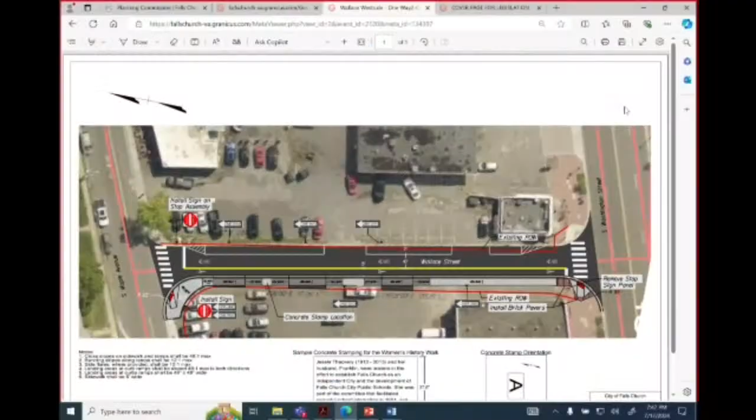One of the bigger issues or comments we had from last time was that the width of the street was about 15 feet wide, and seeing if there was a way to reduce it. So one of the things we tried to do is include a bike lane, and by shifting some of the curb lines, we were able to include a contraflow bike lane to maintain two directions of travel, as Paul said, with the northbound side being a shared lane. So we were able to get that width down.

I think that also resolved another comment about the speed hump and how necessary it was. By reducing the width, we were also able to omit the speed hump from the design from last time.

I think there was another comment about the curb ramps, seeing if we could make those more parallel with the crossings, and we were able to accommodate that as well.

There were a couple other comments we thought over but did not include in this iteration. One was trying to reduce the amount of driveways—there are 3 driveways we're maintaining on Wallace Street. In talking this over with Zach, it seemed there wasn't a precedent to remove or reduce driveways if we weren't already changing the lane use there. Since it was going to remain parking, and the property owners weren't interested in including the sidewalk project on their property at all, we decided not to go that route and just maintain the 3 driveways we had.

Thank you for responding to the comments. I really appreciate the way you walked through those. I do wish the speed bump was in there—we talked about that last time. I also wish trees were in there, but I'm glad to see the contraflow bike lane. I think it's generally improved, and I understand the narrow street is going to be a traffic calming measure too. So I appreciate that, but appreciate the way you responded to the commission's comments.

Let me open it up to other commissioners for any other comments, questions, or concerns. Ms. Freelander.

I was a little disappointed that all the discussion for adding trees and a streetscape that actually meets the streetscape standards—since we're trying to make this more pedestrian street by narrowing the width—I was a little bit disappointed that was sacrificed for a bike lane in the opposite direction.

When I'm looking at the bike plan, the master plan bike plan update, this area does not have a connection on South Washington at this location identified as a priority route. So I'm wondering why we are adding to and diluting the master plan for the bike where we want to be directing bike traffic. We're already going to be narrowing the street, making it one way. I'm in agreement with making it one way to slow traffic down and narrowing it, but I don't want to sacrifice having a pedestrian-friendly streetscape when it's literally a barren wasteland over there right now, as a pedestrian.

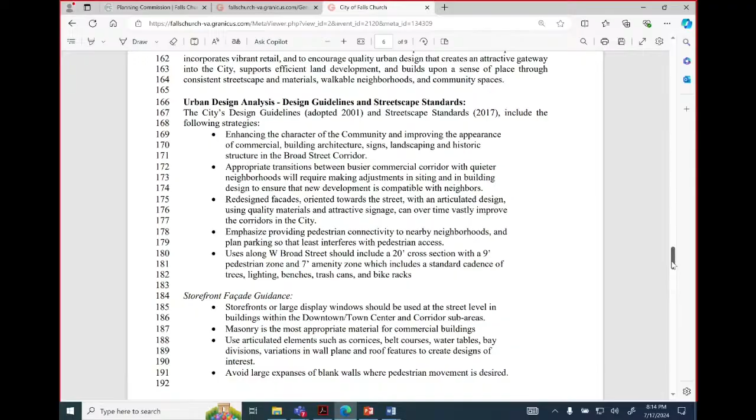To date, staff has reviewed three submissions of the site plan for compliance with city codes, policies, and regulations. As you may remember from the previous work session, the first review of the application materials identified several instances of missing necessary information or proposed site features that would require waivers of site plan requirements in order to be recommended for approval. The applicant's second and third submissions reduced the number of these missing items but did not address several others. Staff also identified some inconsistencies between the engineering and architectural plan sets. With this third submission, staff has been able to review the requested waivers and their justification.

Most notably, the requested parking waiver is not necessary, given that there is a surplus of proposed parking. This may also mean that some or all of the required 5% parking lot interior landscaping or landscaping buffer may then be provided as opposed to waived.

Staff comments on the third submission of the materials were transmitted to the applicant on July 3rd, 2024, upon completion of our review. One other procedural note: tonight the Yassini Jewelers site plan is under review next door by the Urban Forestry Commission, and a recommendation from them will be made available before any public hearing on this application. However, while site plans are typically also reviewed by the Architectural Advisory Board, the AAB was not able to reach quorum for their July 10th, 2024 meeting in which the project was scheduled to be presented, and the AAB recesses in August.

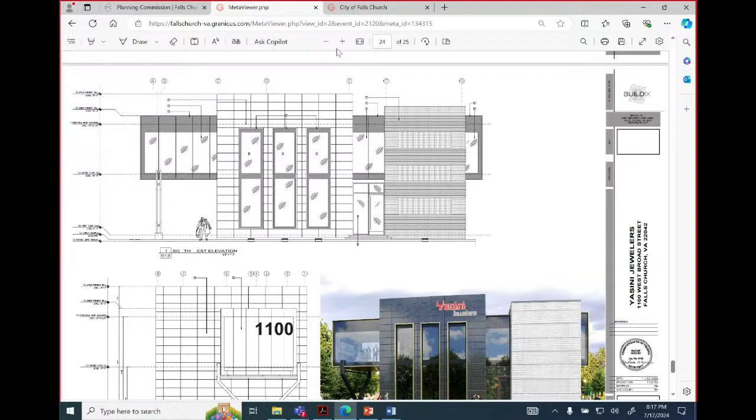So as recommended, we added 3 windows in front of the building. You can see on the 3D renderings. And we removed that driveway, the drive-through that was there. So those are the only architectural recommendations that you had during your last session. And I'm here to answer any questions about the proposed new

revised elevation of the building. Anything else from staff, or? No, that concludes our staff presentation. Thank you. Okay. Any comments from commissioners? This is a reminder, just a work session item, so.

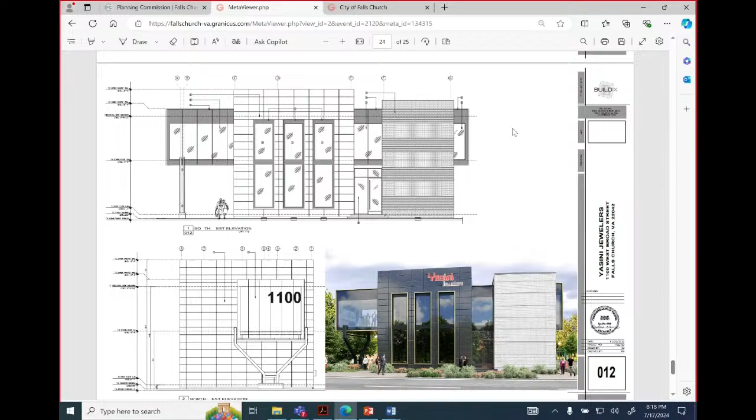I guess one thing I should comment, I know it came up earlier about what happened to all the city arborist comments. Charles Prince, the city's arborist, is out of the office on medical leave. And so we do have a second certified arborist on city staff. Eli Swadner is also a certified arborist. He's actually the head of our tree crew. And so while Charles is out, Eli's going to be reviewing, of course, all the development applications. He's actually sitting in with Urban Forestry tonight on the other side of that wall. So we will be getting those reviews. It's just taking us a little bit of time to catch up with where we are in the timeline.

Thank you. Small correction there, Paul. Charles did review the latest submission, and he actually indicated that he had no comments on the submission. So our interim arborist will get any future submission and will be part of the review. So it's no comments from the arborist at this time? At this time. The expectation that... Yes. Yes. Thank you. Okay.

Comments from commissioners? Let's see, Mr. Krasner and Ms. Freeland. Yeah, I just had a procedural question. Just the issue of the architectural board, is there a mandate for them to review it? Or is that an advisory thing? Where does that live in? I know we have statutory authority to approve site plans. We did have to look into this. Where does that live in the city code, or where is it? Or is it just advisory? Yeah, we did look into this, and it does say that the Architectural Advisory Board does have to review site plans, but it also does indicate, along with, I think it's the Historical Board, does also have a certain period of time in which they must be given the opportunity to review it.

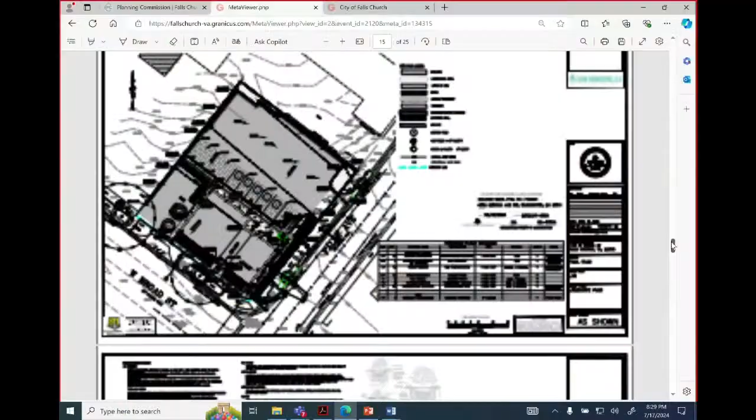It looks like there's a lot of signage, which is great, but you passed the landscape plans. For the signage, have we received a signage package? I'm sorry, I thought you were responding, there must be a lag on the line. Were you going to respond to the landscaping question?

The only thing about the landscaping - you said the older one seemed more current. I was confused by that statement, because the one shown on the screen right now states it's sheet L01. The cantilevered portion of the building is not shown, and it appears to be over a tree.

We had a previous session like this back in February, and during that meeting we were asked to remove the curb cut on West Broad because we already have one on Falls Ave, and within that we moved the cantilever because it was for a drive-through for the bank.

It's in the rendering, though. So I agree with removing the curb cut on West Broad to achieve more landscaping, but the building rendering indicates a cantilevered portion on the second floor that extends over the pedestrian walkway to the west of those buildings - the shaded building here - that is not shown on this plan. So the cantilever that lives above those trees is not shown, and those trees appear to be 20 to 35 foot tall trees. If you look up the tree type, it's Carpinus caroliniana.

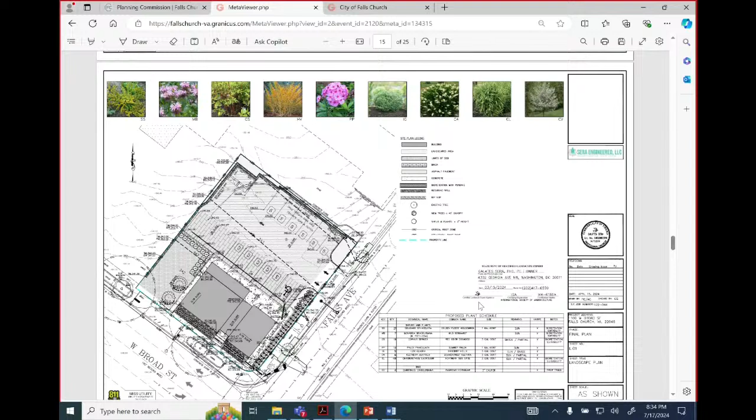So I'm looking forward to it actually coming to fruition, and to get there, we've got to work with the city to figure out how to get them what they need in terms of the trash truck, and making that a safe turning radius in and out, making it look realistic, because I was a little concerned that the approach isn't realistic.

I agreed with a lot of the DPW's comments on that. There's also a couple of other comments on one of the civil sheets that still refer to DC standards. So we've got to make sure you pick up not only the Maryland standards and change those to Virginia standards, but also the DC standards being referenced as well.

But I'm really looking forward to seeing this further developed after you've worked with the city, maybe with another couple meetings with them to get through all the comments.

Thank you. I don't know who asked us to, but we were going through the comments, and one of them was about the trash truck coming in and out—can we reverse in, or do we have to come in front end and leave front end? I know there were probably some conflicting comments that cropped up on that issue.

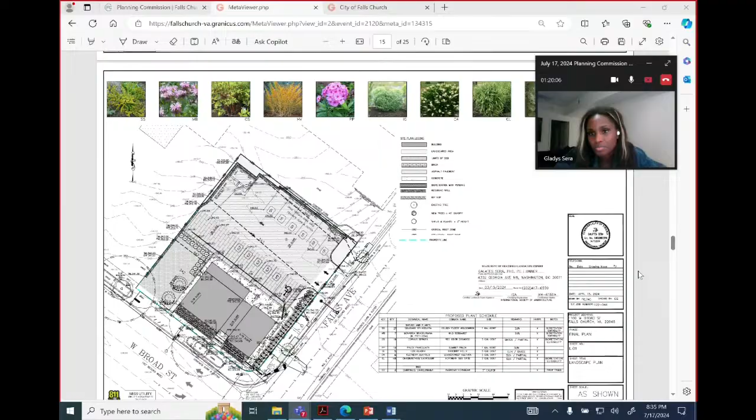There is a stipulation in the city code that car parking cannot back out onto the public right of way, but as the planning and zoning staff have looked at that, we're of the opinion that same restriction doesn't hold for trash and loading. The principle behind that is trash and loading is a fairly uncommon thing—it's not happening as a matter of routine throughout the day.

Larger trucks have backup alarms, they have professionally trained drivers. So I think the planning and zoning staff is of the opinion that, especially with smaller lots like this one, allowing the trash and loading to back actually does a lot for you in terms of urban design and walkability, because it allows you to get to a greener, more landscaped site. Otherwise it took heroics to show the turning movements in the parking lot, and as a result almost 30-40% of the hard surface was just for that three-point turn.

So I think it's acceptable to have the trash and loading back, either back into the site or back out onto the public way. That's a common condition even in our special exception projects—for example, the Lincoln at Tinner Hill has trash and loading backing out onto Maple Avenue.

Because it was a comment by every agency, how do I address that comment? For the people that aren't here? Sure, I think in the comment response you can just say, per conversation with planning staff.

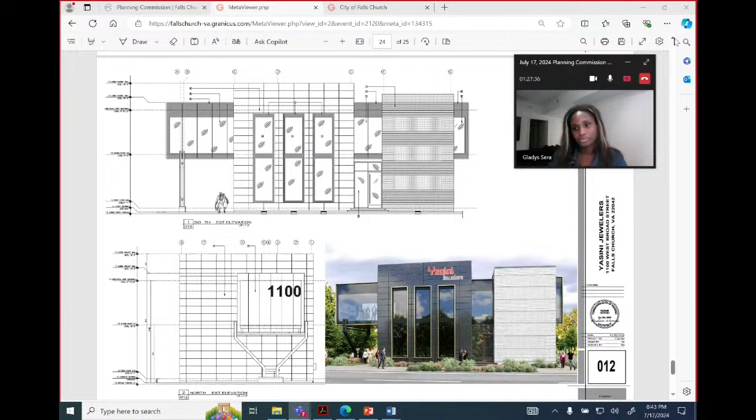So I guess I'm just left with, we'll only have one waiver, really. Okay, that leads into my last comment, which is I hope that with staff, we could make the final thing we review as clean as possible, so we don't have a lot of requests for administrative changes—for example, consistency between the architectural and engineering plans—resolved before it comes to us for a final vote. I'd appreciate that. I think we're making good progress, and hopefully we'll bring this to the finish line pretty quickly.

Thanks. Thank you, sir. Thank you, Mr. Stevens. Other comments from commissioners? Just one quick one. I agree with Mr. Stevens that moving forward at a pace is desirable.

I'm curious, is there anything in particular that staff needs from the Planning Commission to facilitate nailing down these last few issues with the applicant? Do I need to pound on the table about something, or refrain from pounding on the table about something? I can't think of anything right now. I think the road ahead of us is pretty clear as far as all the cleanup items we have to do before we bring it back to you.

So, okay good. What's the calendar, Paul? Maybe this is your question for this to come back to us. Are we aiming for September or?

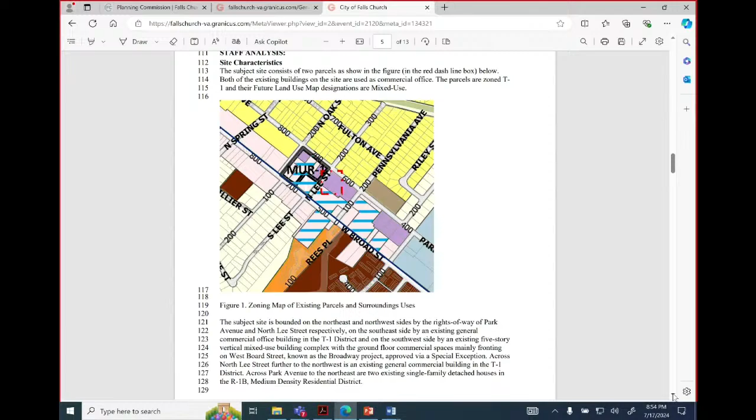Now let's go back to line 101, this proposal: basically 20 new townhomes. There are 3 types of models proposed in this site plan. The largest one is the unit with 20 feet of front width, with net floor areas ranging from 1,745 to 1,771 square feet. There are 6 of them fronting on Park Avenue, and this larger townhome has a two-car garage.

The other 2 types of units are: the one with 14 feet of front width, which has a square footage range from 1,000 to 1,248 square feet, and the 16-foot ones, the last model, which has net floor areas ranging from 1,512 to 1,522 square feet.

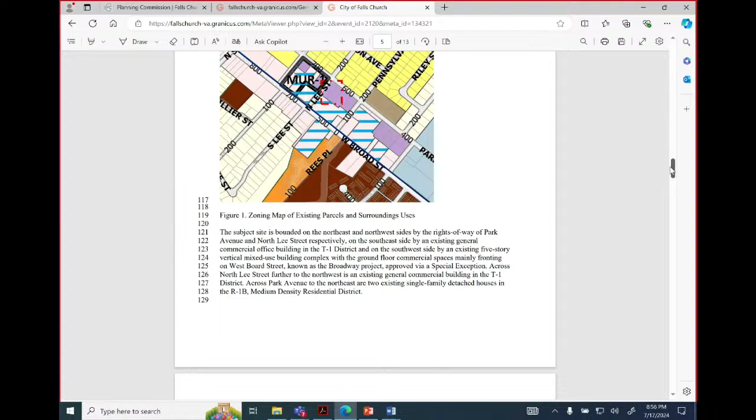Let's go back to line 17. Staff has reviewed this first submittal and basically finds this project meets all the zoning requirements, specifically the T1 transitional district, which has a very comprehensive set of indicators, which on line 153 it basically meets everything. This site plan doesn't request any relief from those requirements. Both the site plan and subdivision plat generally address all the applicable city code requirements for site plan and subdivision, and also generally meet all the governing design standards and design guidelines.

However, we noticed there are some key issues that need the Planning Commission's review and consideration, starting basically on line 30. Number 1 is basically under the site civil and landscaping.

Staff has requested additional information regarding the design relationship between this proposed townhome and the mixed-use Broadway building. On July 4th, the applicant submitted a rendering, also included in this package, which provides a certain cross-section to define the spatial relationship between the two end units, lot 13 and 20, and the mixed-use building. I think some of the concern has been addressed with that cross-section.

The second part of the site-related information is kind of mislabeling of dimensions. We need additional information, including the setback of the proposed transformer from the property line, and the length of the proposed T-shaped alleyway, ADA compliant route and ramp, so on and so forth.

So to give you an overview of the project, that's the site plan on the right. For quick reference, Park Avenue is at the top, which is north, and North Lee Street is on the left. The project is 20 townhomes in 3 buildings, resulting in a density of 29.2 units per acre. Repeating what Henry said, there's a diversity of product type here—they're all townhomes, but with different unit sizes. We have 6 units that are 20 feet wide, all located along Park Avenue.

These will have 2-car garage parking, and it's our intention that they will also have elevators. There will then be 8 16-foot wide units and 6 14-foot wide units. So the average net unit size ranges from 1,000 square feet to just under 1,800 square feet, and the average, as shown here, is just under 1,500 square feet, which is the cap.

There is a 10-foot step back required along Park Avenue, specifically facing the Broadway, which is at the bottom of the page. That's at the 4th level, so a step back at the top, above 40 feet. You'll see in some of our slides later that we're actually providing that along all of our frontage.

From a parking standpoint, we are exceeding the parking requirement of 1.0. We're providing 1.3 parking spaces per unit, since the 6 units along Park Avenue will have 2-car garages. From a street parking standpoint, we'll actually be increasing the number of parking spaces provided on the streets on the frontage here, both on Park and on Lee. There'll be a total net increase of 2 parking spaces on the street, just as a result of reducing the number of curb cuts versus what's there today.

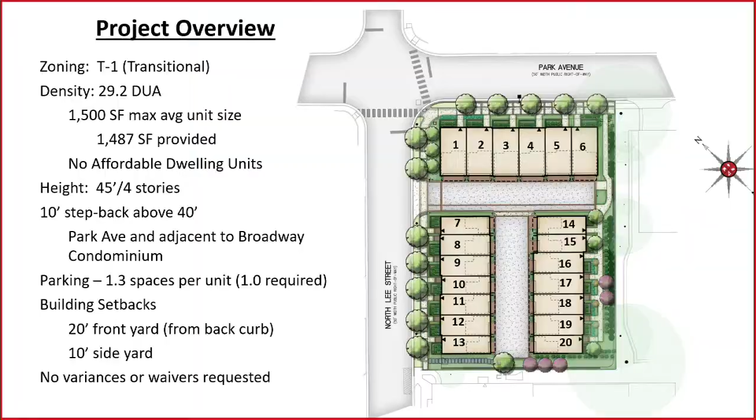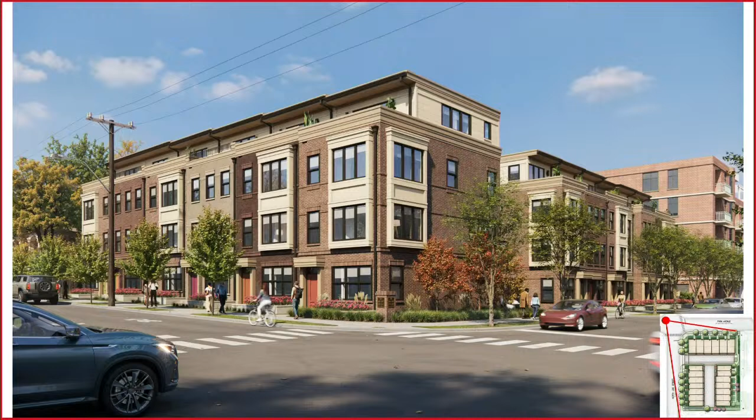So we prepared several renderings that really, we think, capture the project and what we're proposing here. I do want to make a disclaimer that we believe these are accurate, but to the extent that there's any details that are inconsistent with the site plan application, the more technical drawings in the site plan application will govern.

But this, as you can see from the key in the bottom right, is looking from the intersection of Park and Lee, looking more toward the south. So that's units 1 through 6 in the foreground, and then going toward the right, that's units 7 through 13 along North Lee Street, and in the distance is the Broadway condominium.

I will have our architect explain the design vision in just a moment, but I do want to highlight a couple of things, particularly on this slide. So if you look at the 4th level along Park Avenue, you can see the step back, which is 10 feet, which is the requirement from the street, or from the front of the building, rather. That's a required step back.

Along North Lee Street, you can see units 7 through 13. That is not a required setback, but we are providing that, and that really creates a more consistent look. We know that there was also some concerns raised about the spacing of the street trees. We have made adjustments that's really reflected here, and more importantly, will be reflected on the second submission of our site plan. So we'll be increasing that spacing to 20 feet to meet the requirements.

I think the 10-foot setback on the 4th level works really well. If it wasn't a requirement, we probably would have done it anyway. It keeps the massing more at the street level, so no one feels overly small walking past a 3-unit townhouse with 4 stories above, but it still allows the owners privacy.

If you see along the side, there will be some small rear decks, just for grabbing some air and talking to your neighbors and seeing what's going on. One comment we got from the earlier submission was to try to make each unit feel individual. So the massing is similar, but we changed the color of the brick and the detailing, and gave some individuality to the front doors, which are a different color but still in keeping with the warm brick colors.

We're proposing 4 different color schemes. You can see there's a light one, a medium brown, and so on - maybe one that's all monotone. We talked about possibly a painted brick, but we might try to achieve that with a lighter colored brick. Our goal was to create something more transitional, in between your typical colonial and ultra modern.

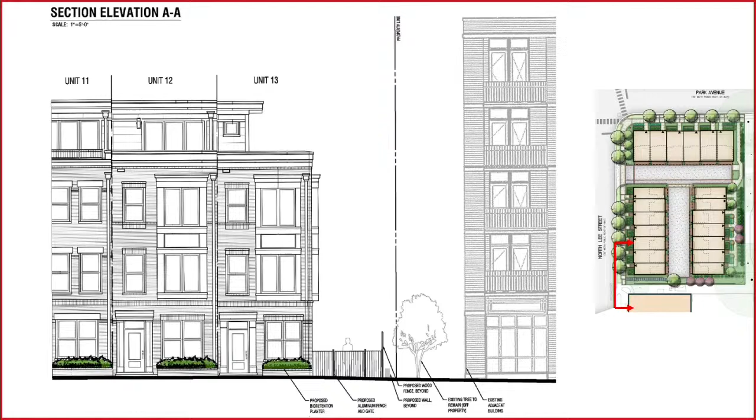The step back is required above 40 feet. The height of the building here, as measured from the grade, is approximately 35 feet. From the grade to the cornice line right here is approximately 35 feet. So we're actually stepping back at a lower level than is required by the zoning ordinance.

This next section, from the previous one, you're walking forward into the site about 50 feet. So that's the back of Lot 20. You can see it on the right-hand side in the key. Looking at the key, this shows the relationship to the Broadway as well.

The Broadway in this instance is shaped somewhat like a U, or at least in this particular location, with two wings and a center private courtyard that they have right there in the middle between the two parts. So they have approximately a 6-foot wall at their courtyard. And then you can see the building, which is the gray tall line on the right-hand side.

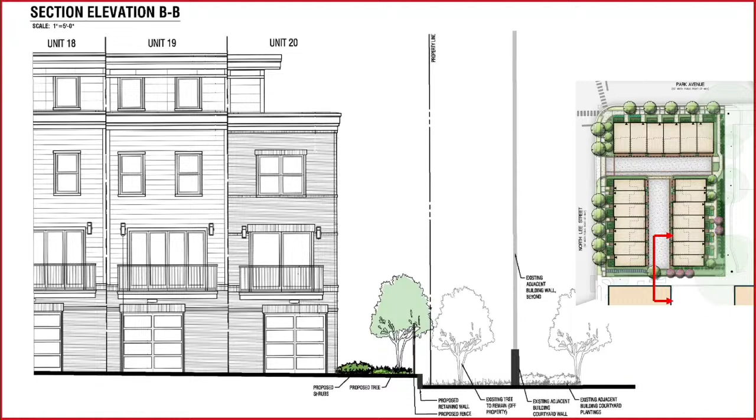That's the building in the distance, which is still the same distance from our unit to the wall. When I say the wall, I meant the courtyard wall. So that's still 22 feet. And again, you can see the retaining wall as well, and the fence and the landscaping.

This section then shows the eastern property line. This is looking south, as you can see from the key, toward the Broadway condominium. So this shows on the right the end of Lot 14, and on the left, that gray block, is the two-story office building located at 605 Park Avenue.

In the middle is the property line. Unit 14 is 22 feet from the property line, and that incorporates that extra 2 feet that I had talked about before. So that doesn't show on the current submission, but it will show on the next submission. Total distance between the two buildings is 39 feet.

Again, small retaining wall with a fence, and there'll be substantial landscaping along that fence, really to provide some variation and make it more attractive, and to provide some screening between the townhomes and the office building and parking lot, and vice versa.

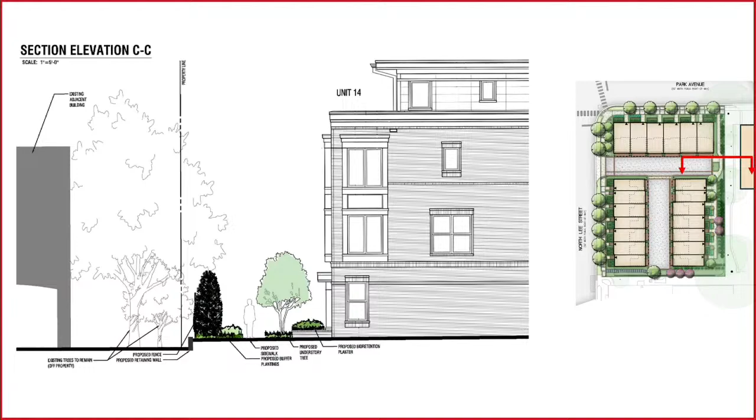So that concludes my presentation. We're all available for any questions that you have. The whole team is here and available. I do note here that there are some 2D color renderings for the fronts of all of the buildings. I did not include them in the presentation because I think the color perspectives better represent what we're actually proposing. But to the extent that there are any specific questions getting into some of the architectural details, I do have them available, I can bring them up. I just didn't want to overload the presentation with that. So with that, if you have any questions, we'd love to hear them.

Great, thank you very much. And thanks, Mr. Zhang and city staff, for a thorough presentation. As was mentioned, this is a work session item, so we don't have any comments. We did hear from some citizens earlier today. We had some written comments, and I really appreciate Mr. Zhang meeting with the citizens and taking the time to work with them. I think that was a really, really smart idea, so I'm glad you did that.

Before we jump in, let me just ask one question for staff. There was a legal question, I guess, about the consolidation, particularly whether or not the property at 609 Park assumes the attributes of the corner lot when it's combined.

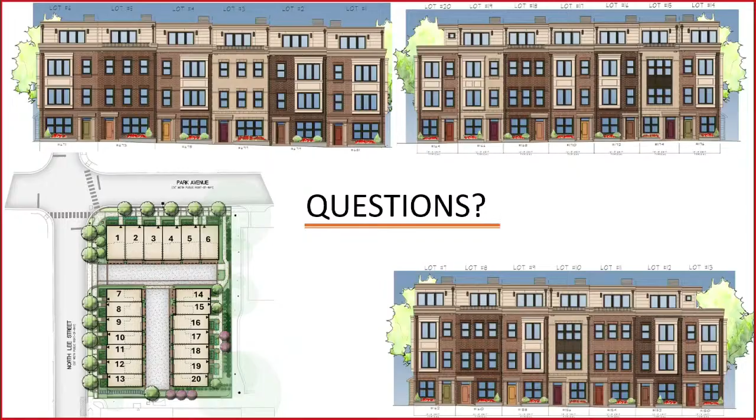So again, there was a lot of discussion — you knew I was going there — about affordability. This isn't a knock on you as the developer, but we need to think about what we just designed with the T-zones. We've enabled somebody to come in and build a $1.5, probably $1.6 million by the time you're done, townhome. This is not affordable housing. We thought when we did this with the T-zones that we'd get $800,000 townhomes. I thought that was too much, but I could tell there was an appetite for that type of unit in this town, because people were comparing $800,000 to $1.5 million. But now, with what we've just designed, we have a $1.5 million unit in front of us.

What were we thinking? Again, it's more about us as planners and designers — we tried to do the best we could to put limitations on the T-zones so that we would end up with $800,000 units. We knew it would go up a little, but I don't think anyone in this room thought we'd get a $1.5 million townhome in front of us for the second T-zone application. So I'd suggest we be more cautious and careful. I know this took us two years to get through the T-zone, but I don't think we did a very good job.

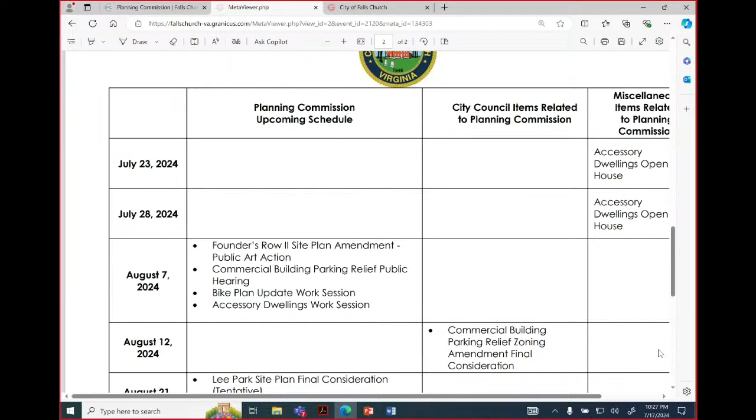So two things to make the commission aware of: end of July, one's a weekday, one's a weekend. We're holding the first community open houses around accessory dwellings. Of course we're in the early stages of this, so we're going out to these open houses to communicate what accessory dwellings are, how they typically get constructed, what form they take, what other places are doing around regulating them, and then asking the important question of what people think is appropriate for regulating them here in Falls Church. That's July 23rd, next Tuesday, and then July 28th, the following Sunday.

For your agenda, August 7th, your next regular meeting, again a full night: Founders Row 2 — you had seen this before, if you remember, the moving metal sculpture with the seagrass for Founders Row 2. Because of their VCs, that's coming back to you as a site plan amendment, so that'll be for your final consideration. Also, commercial building parking relief.

We had originally thought that was going to be on your schedule tonight, but because we forgot about July 4th when we put in our ad order, we actually missed the advertising date to hold it tonight. So instead, we'll schedule that for your next regular meeting, August 7th. There was quite a bit of concern or conversation about it two nights ago at council, and I guess concern that they hadn't actually heard from you yet, so they are looking forward to receiving your recommendation and thoughts on that.

Bike plan update: we had held a series of walking tours led by Carrie Odinino to talk at the neighborhood level about the proposed routes. A lot of good feedback, questions about parking utilization, pedestrian safety, and really looking for more of a complete streets approach. That will be coming back to you on August 7th. The intent is to keep the plan on the same track, getting to final consideration by council this September. Assuming that part goes on schedule, we would refine the designs with the input we got from the community and take that back out for a second round of neighborhood meetings in the spring of next year, which would still be well ahead of any construction or installation.

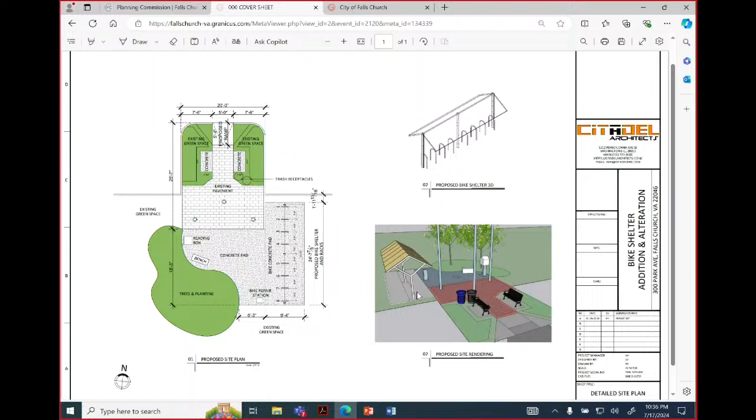So that's that. And then the next item in the director's report.

There might be an attachment for that one as well that we can jump to. It's going to be a bubble diagram of a site plan sheet - this is the required notice we sent out to area property owners, and the bubble sheet identifies the locations of all the changes. So that's just an FYI that was approved at the staff level, with no changes to the facades, architecture, or building setbacks, anything like that.

And then the last item I had written up is actually sharing the Planning and Zoning Quarterly Report. Emily Bazemore is the one who does the effort to get everybody organized and get this report produced. As usual, it captures 3 months of activity looking back, and then projects forward at least 3 months into the future about what's going on with each project. If we're able to jump to the report.

And Emily, I'm kind of putting you on the spot here, so this is an invitation if you want to take it. But if you want to walk through the highlights, the certifications everyone earned over the last year, and then, of course, how we're aligning our work to the strategic initiatives.

So with each iteration of this quarterly report, we have personnel highlights. For this particular report for Q2, you'll see that we included some certifications received by different team members on the planning team. Kurt Lawrence received his LEED Green Associate certification back in March. We also have a couple of certifications received in June: Certified Zoning Official, which Laura, Angel, Willis, and Henry all received. And Jack Trainer received his AICP also in June.